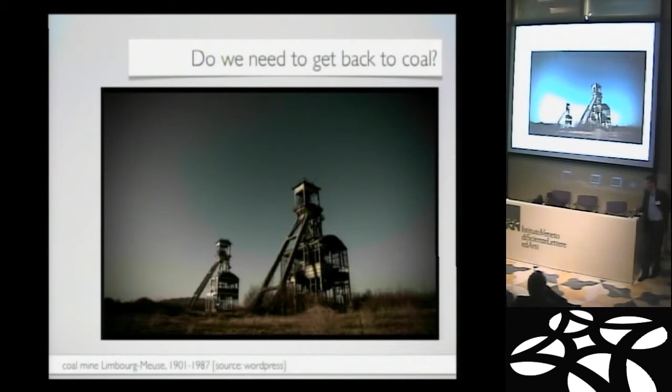Do we need to get back to coal? Burning coal. This is an old coal mine in Belgium that's not operated anymore. Should we start operating them again? We don't want to do that, of course.

We all know that there's already too much carbon dioxide in the atmosphere, more than any time since humanity started to be on the globe. And if you look at the temperature curve, it's very well correlated with the CO2, so we know this causes global warming.

And the polar ice caps are slowly getting smaller and smaller. So this is surely not what we want. So let's have a look at what energy do we really need.

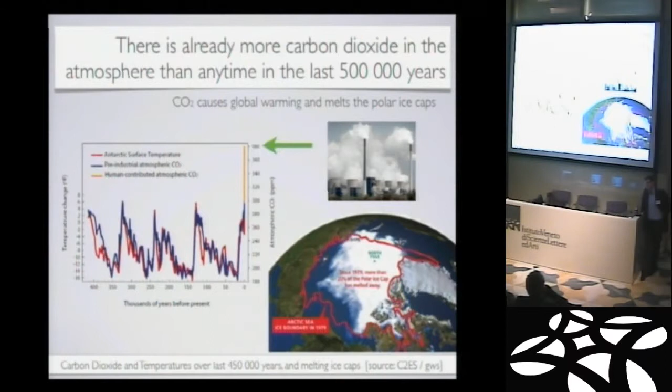I find it a very interesting computation to think of what each of our personal energy consumption is. If you think of a typical European, you can summarize the energy consumption as about 5 kilowatts. That's equivalent to 120 kilowatt hours per day, or something like 12 liters of fuel, petrol, that we burn per day.

To get an idea of what these 5 kilowatts mean, while we are sitting here, each of us has basically switched on some of these heaters that we sometimes have on cold evenings in a restaurant, these strong heaters. Such a heater consumes about 5 kilowatts. That's what we consume from the moment we are born until the moment we die.

So there is a heater switched on for each of us all the time of our life. Basically, that's what a typical European consumes. A typical American or North American consumes about 10 kilowatts, as the whole society. So we are already a little bit better, but I think we cannot reduce that to very low levels, right?

One interesting number in this context, which I was really astonished by, is when you fly once from here to the US and back, it's about 1,200 liters of kerosene, which is about 100 days of our average consumption. So it's very bad for our ecological footprint if we do long distance flights. But anyway, we do it, and this is all included in these 5 kilowatts.

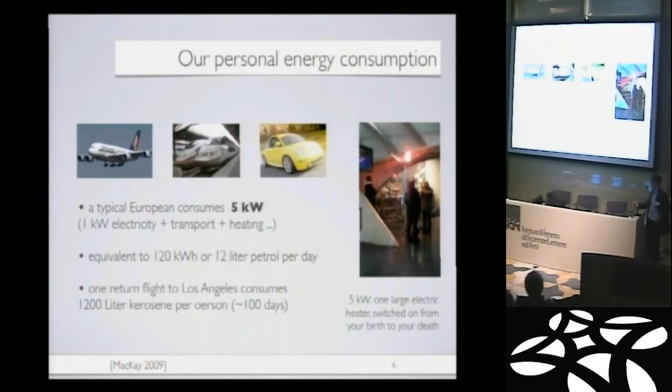So on the other hand, what we really would like to have is renewable energy, and if you look at where renewable energy can come from, it's only sun and wind that really have the potential to satisfy all our needs. And if we look at how much the sun radiates on a nice day like today, it's about...

1.3 kilowatts per square meter, and I will not bother you with too many numbers, but it's maybe interesting to remember this number. If you look at the average energy arriving on the ground in Europe, then basically to get our 5 kilowatts, we would only need 30 square meters for each of us.

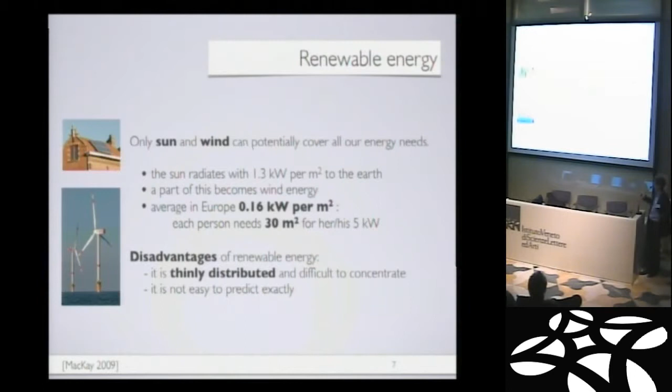That's good news, right? On the other hand, the disadvantage is these 30 square meters would not be enough because we cannot convert it all to useful energy, and also it's very difficult and costly to concentrate renewable energy. So the main problem with renewables is we need to somehow concentrate this energy.

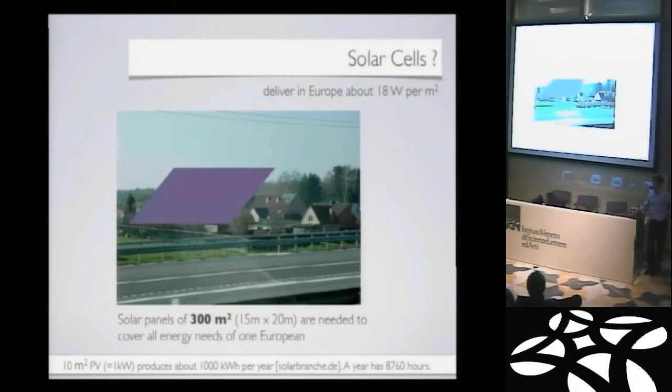Let's start with solar cells, which isn't the main topic, but I want you to get a feeling of how thin this energy is. Solar cells have an efficiency that makes, on average, 1 square meter produce only 18 watts. That's much less than the 5 kilowatts we need. We would need about 300 square meters per person of solar cells to cover our energy needs. That's average European - in Italy it might be a bit less, but not much. So it's this surface per person.

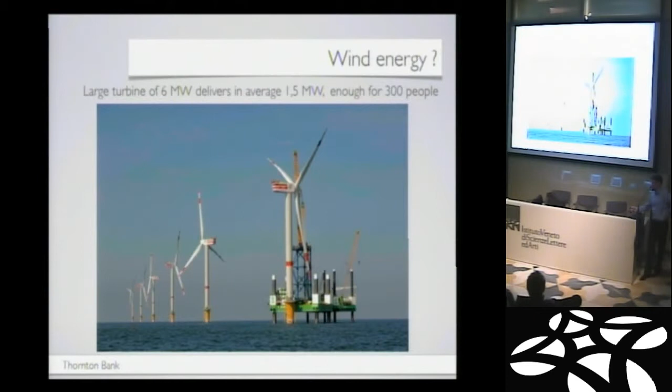On the other hand, there's wind energy, which grew enormously in recent years. The largest turbines now found in the North Sea are about 6 megawatts per turbine, and on average over a year they produce maybe 1.5 megawatts - not all the time is the wind best. But that's still enough for 300 people, so it's a lot. It's very efficient. If you compare one of these wind turbines with the surface of solar cells you'd need to replace it, it's this much surface of solar cells.

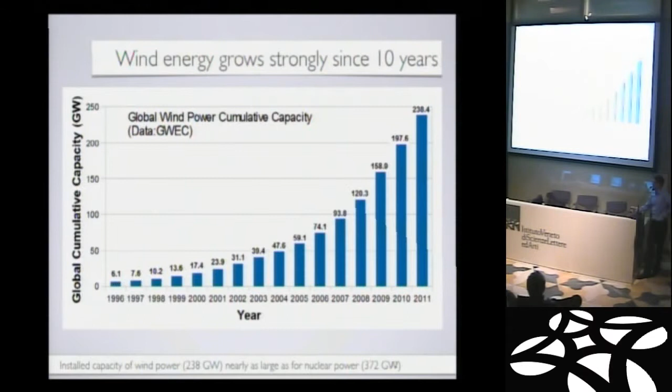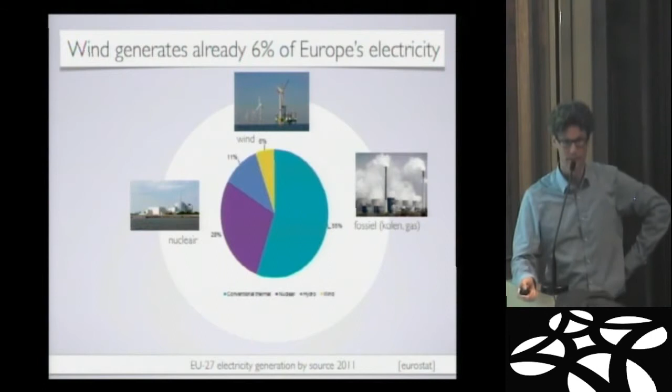It's an interesting technology for sure, and for this reason it has grown steadily for about one or two decades - exponential growth. Today it's about 6% of Europe's electricity production over the year. That's already something. But the question of my talk is: could we harvest wind power in a more efficient way? Could we make it even better?

For one of these megawatts, you'd need about 20 tons of wing material and 400 tons of foundations in the ground, in the sea. These are the foundations, as seen at the Belgian coast. The question is whether we could do this more efficiently.

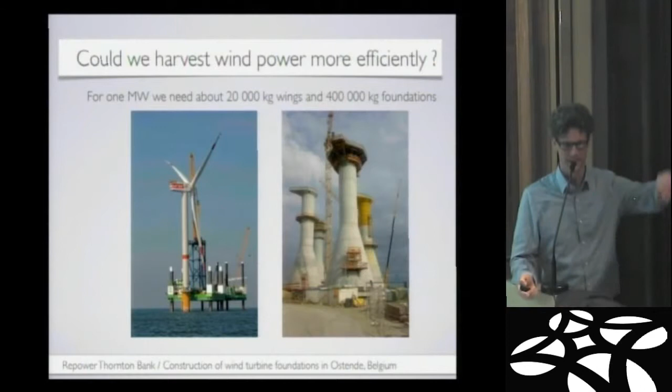That's where airborne wind energy comes in, and that's the topic of my talk.

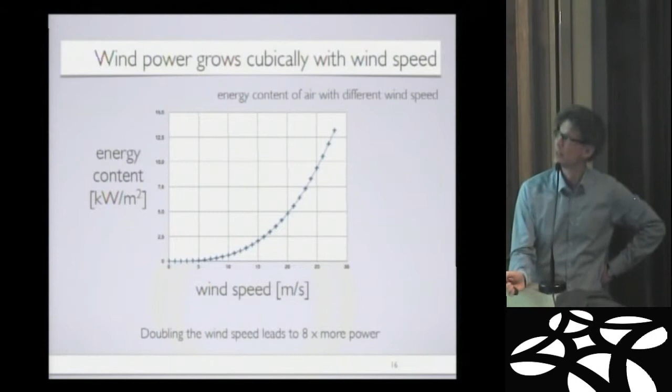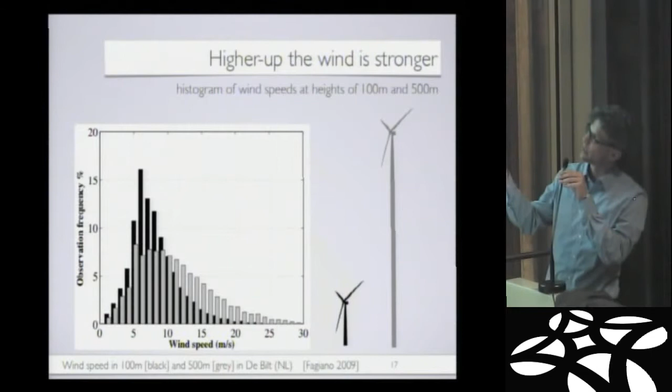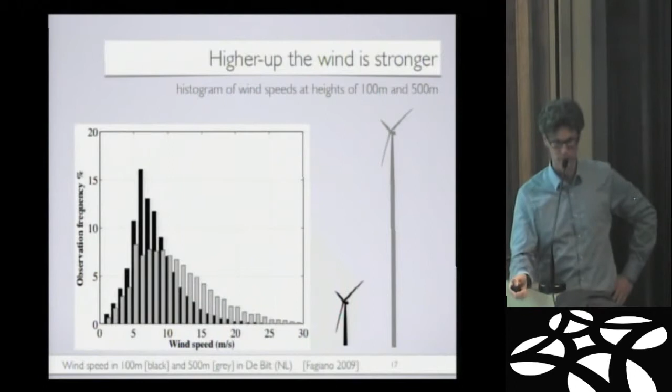That's quite impressive. On the other hand, if you go high, there's more wind, and we can look at this statistically. If you look at histograms of how often we have a certain wind speed at a height of 100 meters, like a small black turbine, we have small wind speeds very often. If we went 500 meters high, we would very often have quite high winds of 15, 20 meters per second. So it would be wonderful to build a high wind turbine.

Another fact about wind power: unfortunately there is no wind power without force. When we take energy out of the wind, we need to put a force against the wind - basically what we take out is the product of the wind speed and the force we oppose against the wind. That's exactly the same force our turbine has to withstand. So there is no wind power without a force.

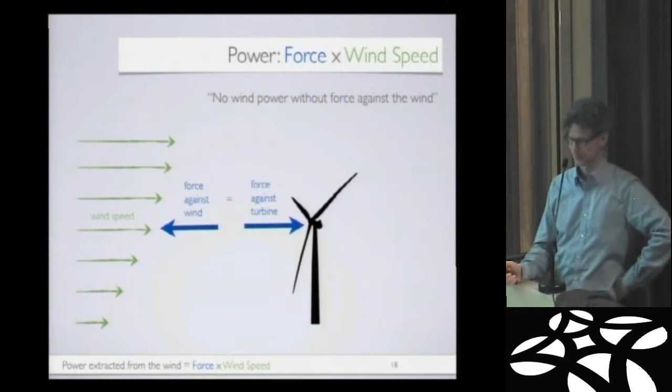That makes it a bit unfortunate to build a high turbine, given this force we need to put against the wind, if we want a turbine 500 meters high. We're able to build buildings 500 meters high, so that's possible in principle. But putting a turbine on top that harvests a lot of power would make your building fall down - you get an incredible bending moment, a torque, that will make your turbine fall. It's impossible.

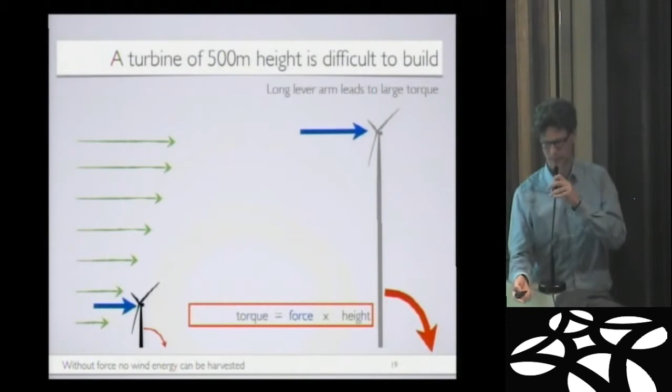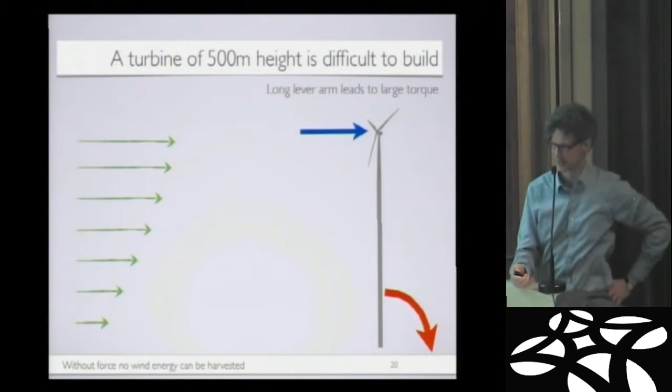So let's look at how we could build such a turbine in a better way. First, it's probably a bad idea to put a stick up 500 meters high to put a force against the wind there, right? So what would we do to get this force more efficiently? We would probably take some line, a cable, and connect it to the ground so we can take this force in a more efficient way.

And that means that we get rid of this torque. We have a force on this line, but forces on lines are much easier to withstand than torques. And so now we still have this large tower, and this is a very strange construction, because if the wind direction would turn, we would need to turn the location of this tower, right? So let's try to get rid of the tower and have something like this.

Now our wind turbine is up there, but the force is not in the right direction. Actually, it would fall down with this. So we need to turn it a bit. Just turn it a bit. And then the force is in the same direction as the line, and we could actually fly.

And this is a bit like a kite, that's what we put into the sky at a line, right? So this is a way to get force up into the sky. We lose a bit of power because we have to turn, but we don't have to turn much if our angle is deep, and if the weight is not too high, what we have up here.

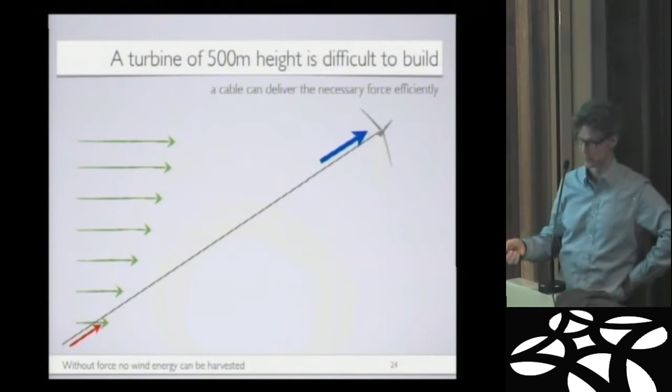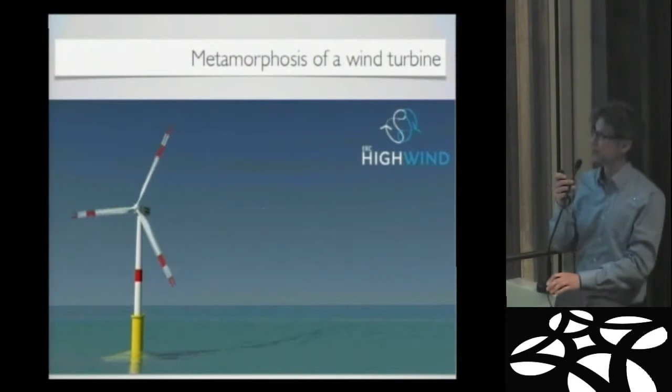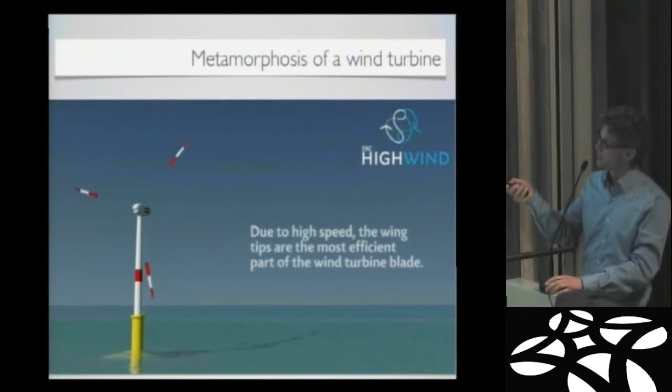So now I want to give you, so to say, our vision. Our vision is that we want to look at a wind turbine and only build the most efficient parts of it. So we take away the middle part of the wing. These wingtips are the most efficient parts of wind turbines, because they move so fast, they have a very strong influence on the wind field.

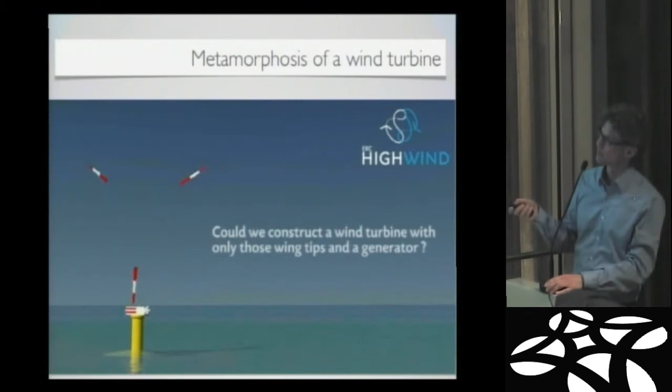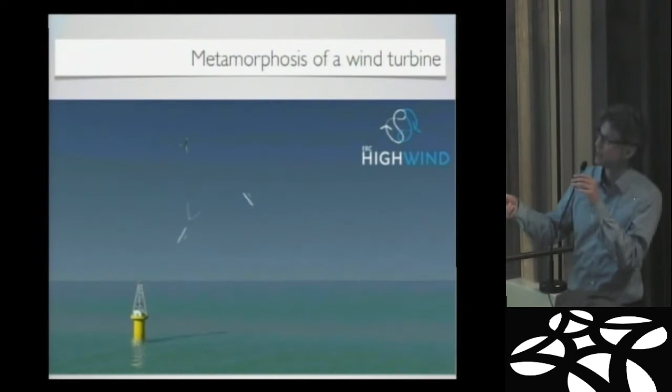Then we take away the generator, the tower, and we put the generator on the ground. And this is something we would like to build. Of course we need to transmit a force to the sky, and that means that we need some form of connecting cables that you might not see because they are so thin. But anyway, we need some way to get the force into the sky. So that's the vision that we have.

That's not reality yet, but I want to show you and explain a bit what is done in this direction, and also what role mathematics can play in this context.

So I hope I didn't bore you with the physics, the basic physics. There's one more interesting concept, and this is not very well known, I think. It's what we call the crosswind effect in this community. And there are actually different ways of how we could get the energy to the ground.

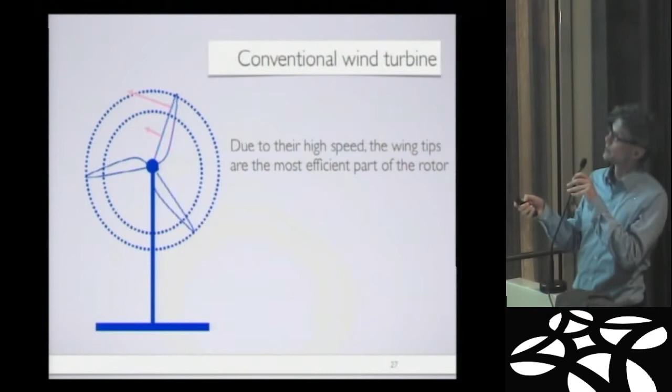So let's just summarize this video, or our idea. We want to build only the wingtips of a wind turbine. And the question is, why should this be efficient? The most important thing that makes these things efficient is actually that our wingtips move quickly.

So we need to somehow have a quick motion of this thing that is at the sky, which means that we need to put an airplane which flies fast circles around, so that it basically harvests this whole area. So that's what we call crosswind, it's flying very fast crosswind.

But still there is an open question: where should we place a generator? There is no use of this at the moment, it's just a toy. But there are two ways, and the first one is what we call drag mode.

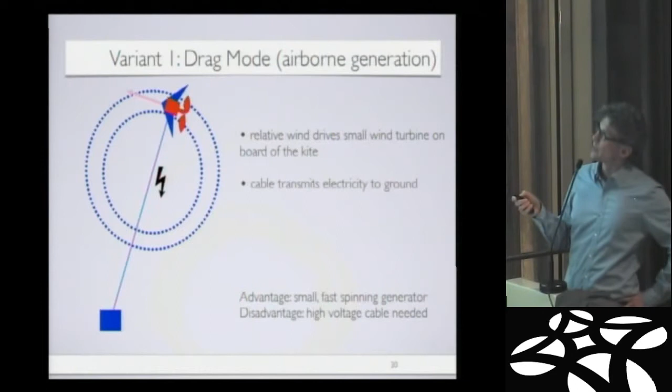Drag mode means you put a little turbine on top of this kite. Sounds like a crazy idea, so you put a little wind turbine with a little generator on top of your big wing. But the interesting thing is, because you fly so fast, your wind turbine indeed needs to be much smaller for the same power, and the generator can also be much smaller because it turns so fast.

So there's actually an advantage: you have a small fast spinning generator for enormous amounts of power. But the disadvantage is that you need quite high voltage cable power transmission through this cable. But this is a system that's built, I will outline that in a minute.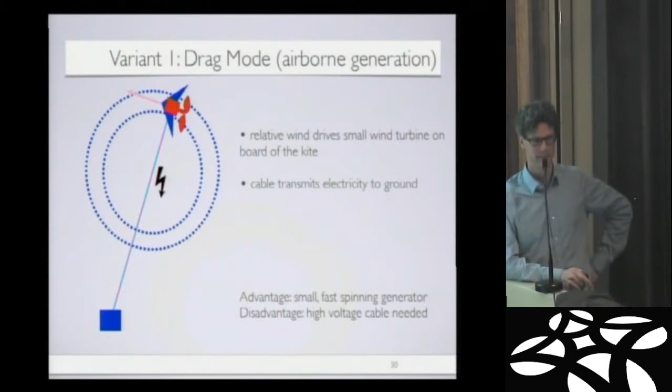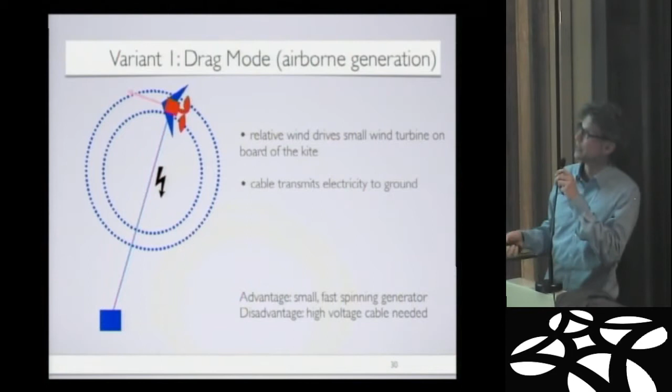But there's a more elegant way to transmit the power that I really like more, and which made me very excited when I found out about it first. And that is the second variant, and that's what we call lift mode.

What we do here is we still fly our kites in fast circles in the sky. This produces an enormous force on the tether, and we can use this force to roll out the tether, which drives a drum on the ground, which then drives a generator. So you basically pull a load.

That's what we do, and we spiral out. At some point we need to invert the cycle to come back with our kite, so we change the angle of attack, fly slower, and go into what we call the retraction phase, flying toward the ground with very small force, so we don't lose much energy.

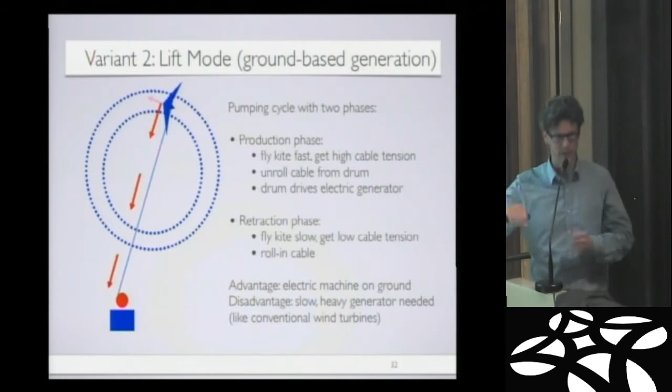The advantage is we now have all the electric machinery on the ground. The disadvantage is that the speed of rolling out and rolling in is relatively slow, so you need a relatively heavy machine, nearly as heavy as the machines on top of wind turbine towers. So we don't get the advantage of very fast spinning electrical machines, which is good for the other variant.

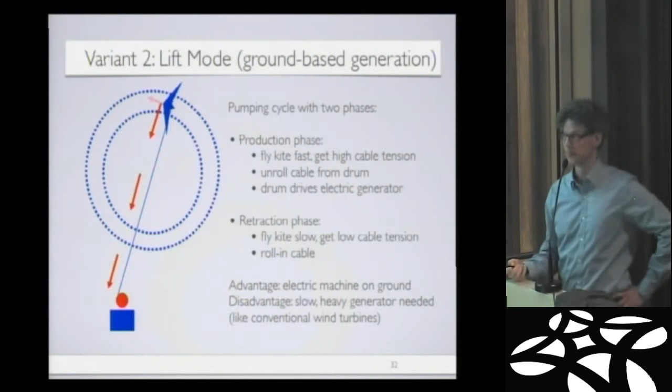To illustrate that more pictorially, here's a picture with a cable and a drum. Electricity is produced while the airplane makes loops in the air. At some point we fly back, there's no tension on the tether, and we lose a bit of power, but this is short and not nearly as much as we produce during the other phase.

I'm a trained mathematical optimizer by my first education, and I want to come to path optimization of these airplanes later. But let's start with the first and very simple optimization problem in this context: how fast should we roll out in this phase?

If we do it too slow, the generator won't turn and no power is produced. But if we do it too fast, the airplane will fall down, because it doesn't see relative wind anymore - it's not driven by the wind anymore. So the question is, what roll-out speed is optimal?

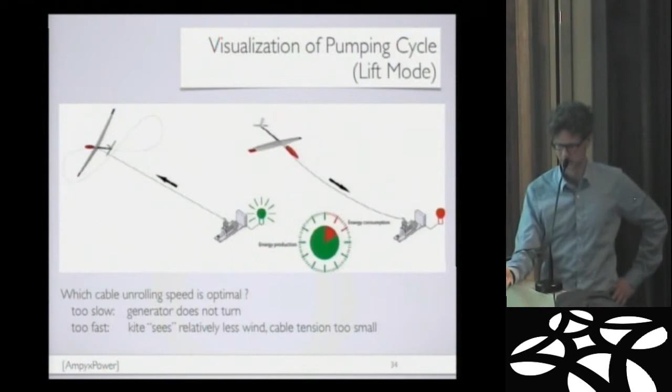If we look at the rolling-out speed as a fraction of the wind speed from 0 to 1: if we roll out at the same speed as the wind, the kite doesn't see any wind, and there's no force on the line - that's this green force curve. The force is maximum if we don't roll out.

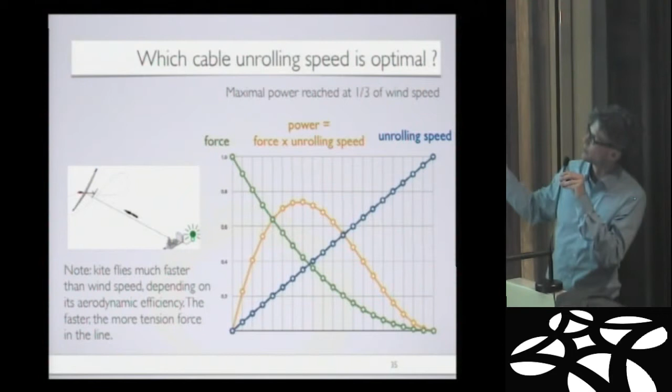Power is force times speed, so if we multiply these two curves, we get a polynomial of third order, which has its maximum at 1/3 of the wind speed. That's the optimal roll-out speed at which we'd generate maximum power.

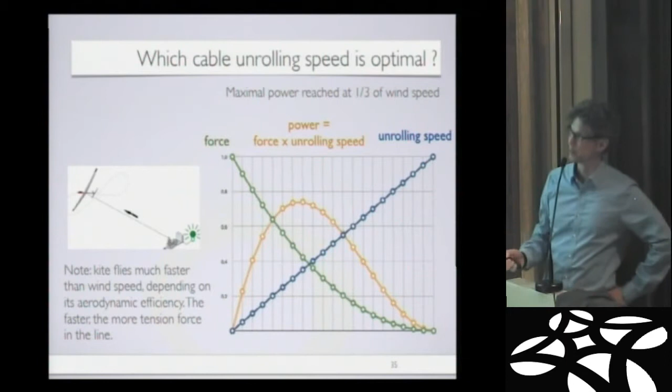If you do a bit of physics using this result, you get a formula that many people in the field discovered independently, and later we found it was derived in 1980 already by a smart engineer in California. So we call this Loyd's formula.

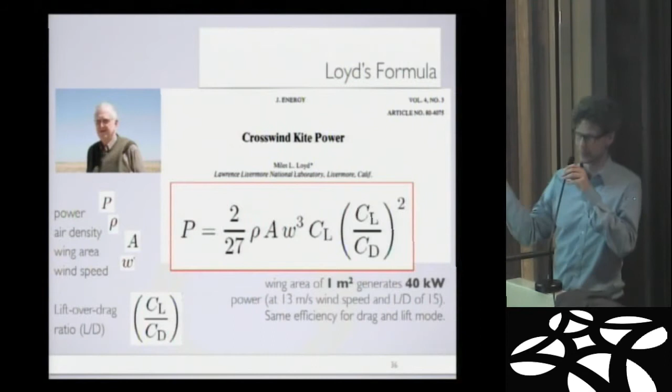That gives a relation of how much power a given wing area in a given wind field would produce. This depends very strongly on the number CL over CD, which we call the lift over drag ratio - something like the aerodynamic efficiency of wings.

For planes it's called the gliding number - the amount a sailing plane can go forward compared to its sinking speed. Typically these numbers can be up to 60 for good sailplanes, so this is a big number.

If you put moderate numbers into this formula, you can easily compute that 1 square meter of wing surface of such an airborne wind energy device could generate 40 kilowatts of power. That's a lot, and this number attracts a lot of people because we think it's really incredible - we should try to get this way of concentrating wind power working.

Just to get a feeling for this number, it's much more than 300 square meters of solar cells would produce. And if you assume such an apparatus would only operate 1/4 of the year at full load, which is realistic, you'd still get 10 kilowatts out of 1 square meter over the year.

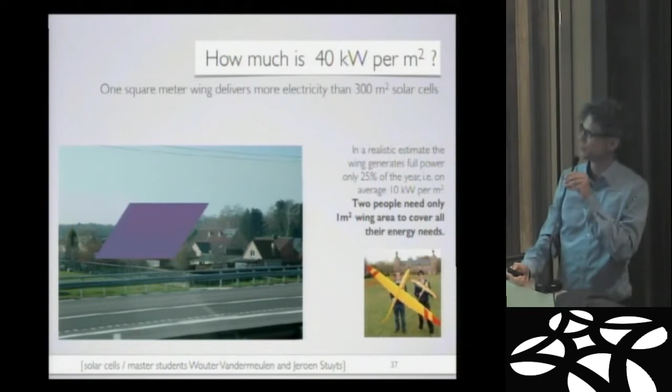And it would mean that for 2 Europeans, this wing area would basically be enough to get their whole energy needs delivered, if this kite is flying all the time, of course, while they are living. So that's what attracts us, and so it attracts a lot of people, and the community is growing.

This was the last of the yearly conferences, in Berlin last September. And I wanted to outline only 2 of the concepts, the many that are presented at these conferences. And maybe to get a big picture, we can classify all concepts.

So there are soft wing concepts. There's also some soft wing concepts investigated in Italy. And then there are the fixed wing concepts, which have basically airplanes. What they all have is something like a wing and a tether. That's it. I want to outline these two, the ground-based generation and the onboard generation that I mentioned before, and show what companies are pursuing this.

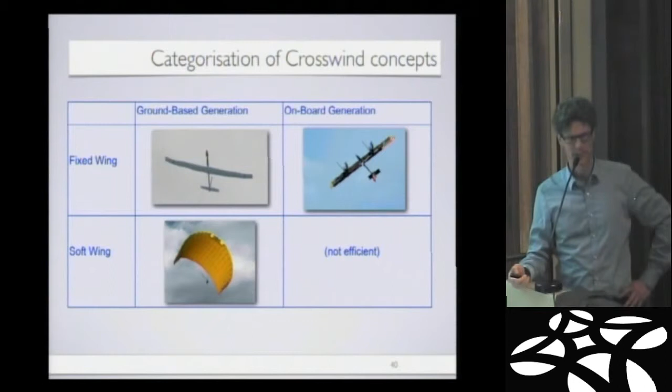So the first one is a company in the Netherlands, Ampyx Power. They build these little planes. They have this cycle that I've just shown, and that's what they want to build. They are about 10 permanent people now. It's a startup at TU Delft, and they are financed by venture capital. We have a joint PhD student starting very soon, so it's a very research-intensive company as well.

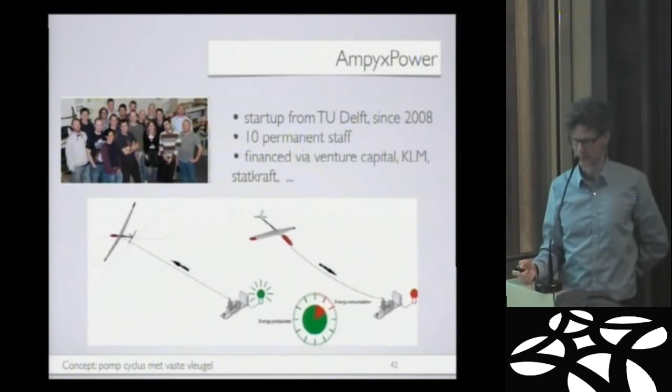So to get you an idea of how that looks in practice, just a very short show. Here you have this winch, there's the airplane, there's a tether, and the plane makes some loops, which means it flies crosswind. There's an enormous tension on this line, and it's going actually out and in, in order to produce power. Now it's going out, and later it will go in.

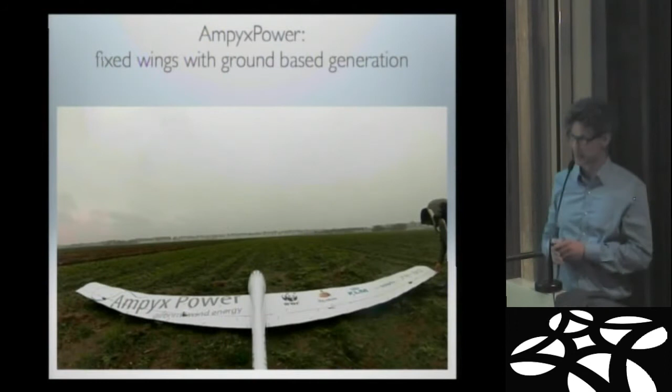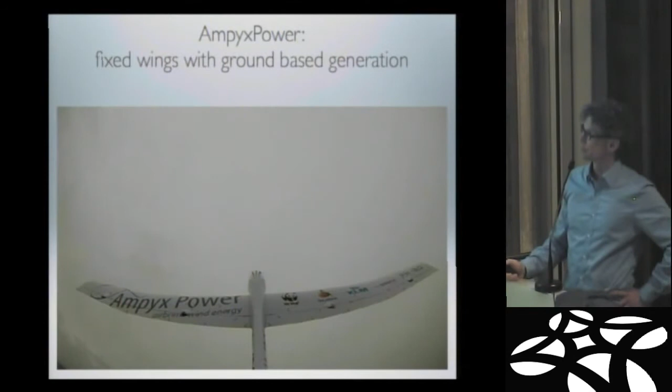I decided that this could be better seen from the point of view of the airplane. So here's how they start, same company. There is a tether, it's pulling the plane up. Now the camera is at the end of this airplane, and it's going pretty fast into power production. You see at the bottom the Netherlands at this season, I think.

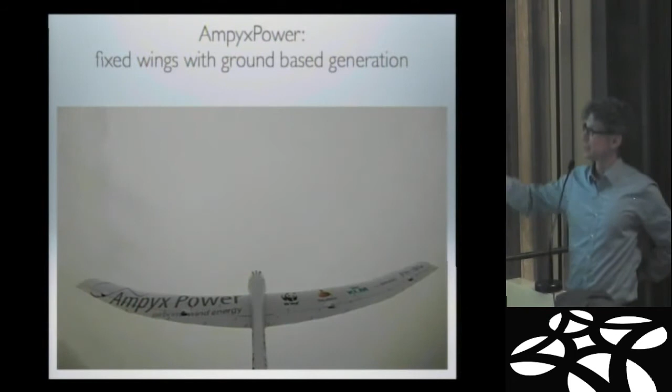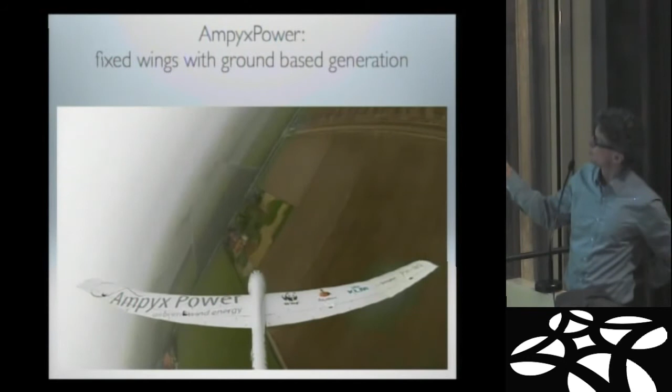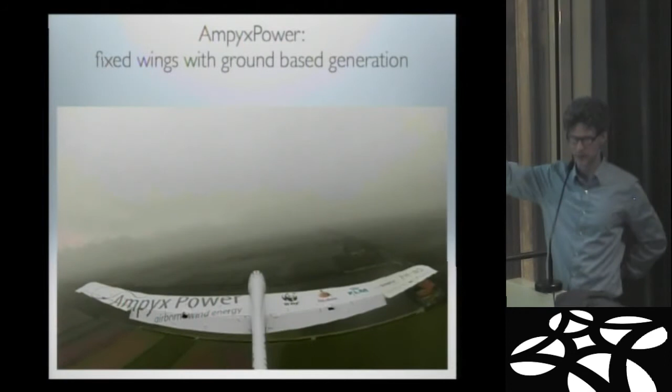And you see that the plane is making loops, so it's turning and producing power all the time. You see a little bit of motion here, so that's how such a plane is controlled, like any airplane. It's still producing power, it's very fast, and now it starts to slow down and go into a retraction phase. So now it's actually flying towards the attachment point and losing a bit of power. And now that's already finished. That was very fast, and now it's producing power again.

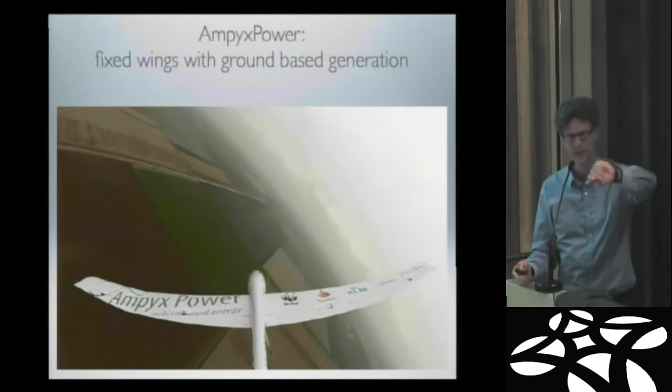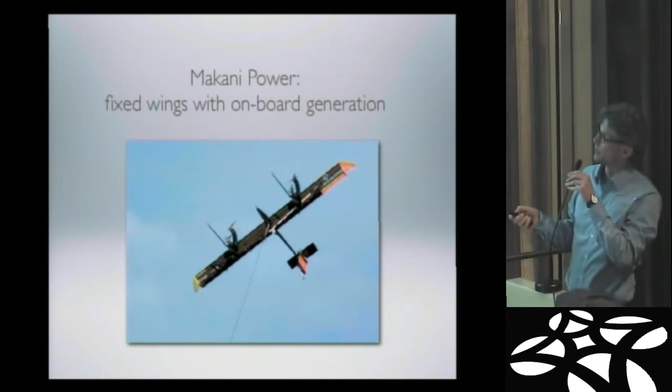So this was the first company I wanted to present. The other concept, which is also quite exciting, I find, is these fixed wings with onboard power generation. This is a startup that's existed since 2006, in California, with about 15 people working on it. They built these fixed wings with onboard generation, meaning little air turbines on board. But recently they were bought by Google X.

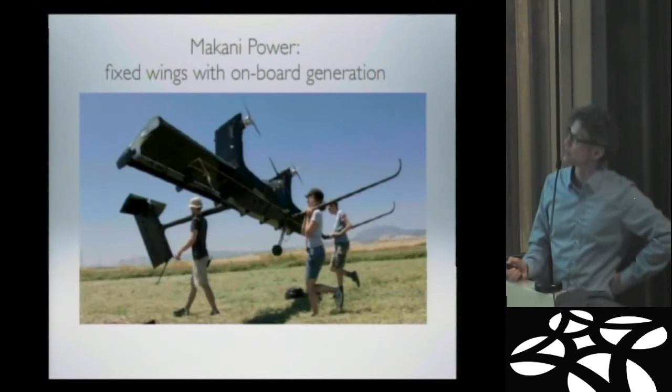That's this secret part of Google which invests into new technology, like self-driving cars and Google Glass and such things. Now they also bought this company, which made this company very happy because they don't have to think about investment anymore. So now what they are doing is they built a plane which has a lot of propellers, at least 4, and then they have a cable, and they fly circles.

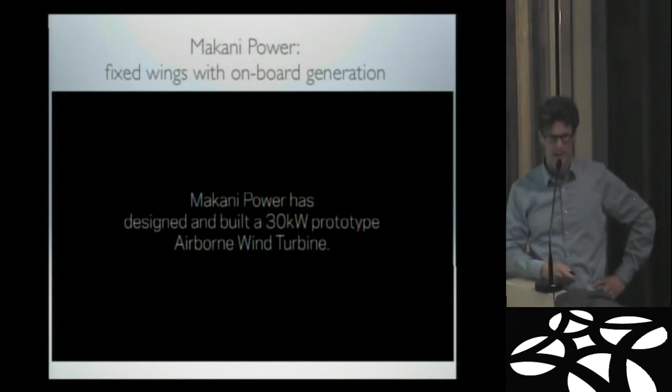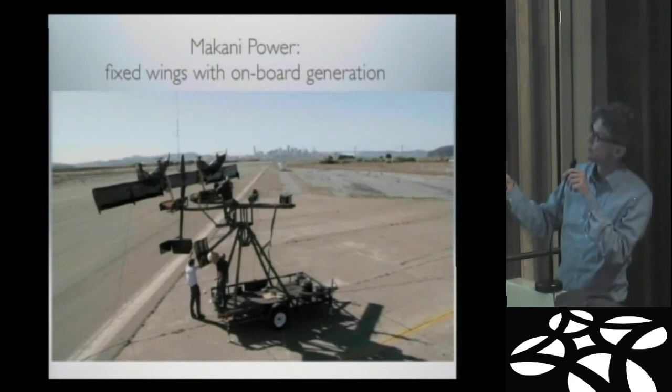So this is one of these circles with many pictures overlaid. And here's a little bit of a video which shows how this system works. What is interesting here in particular is how elegant you can start these things. This is a 30 kilowatt machine, a small one that was already built a few years ago. Here you see it's hanging actually inside a perch.

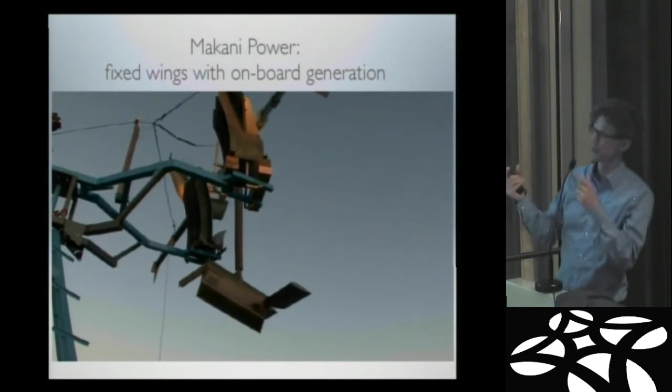This is the control room. And then the propellers start to spin, and there are 4 of them, and so they basically lift this airplane into the sky. It's just hanging on its own propellers, that's it, like a helicopter.

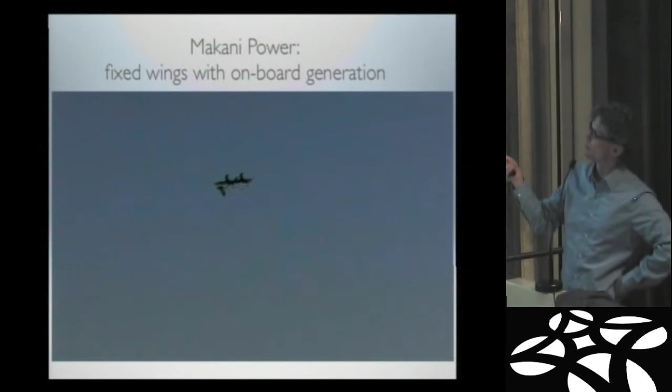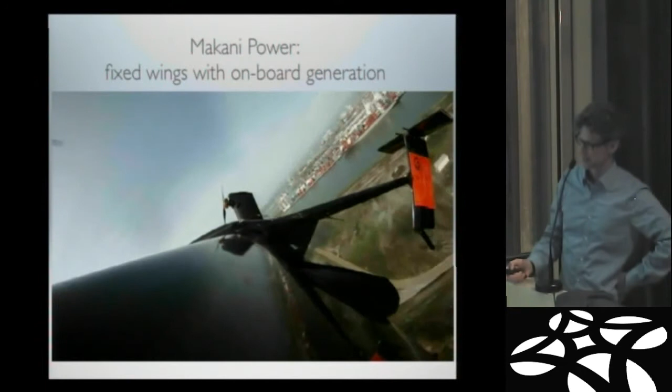So here you see some pictures, and I think I want to go on. This gave a rough idea that this is a real technology, it's existing.

But there are lots of questions you can ask, and one of them is how would we optimally fly these wings? I said already that rolling out with 1/3 of the wind speed is good, but how high should we fly? How long should the tether be? Which angle should it have? How thick should the tether be?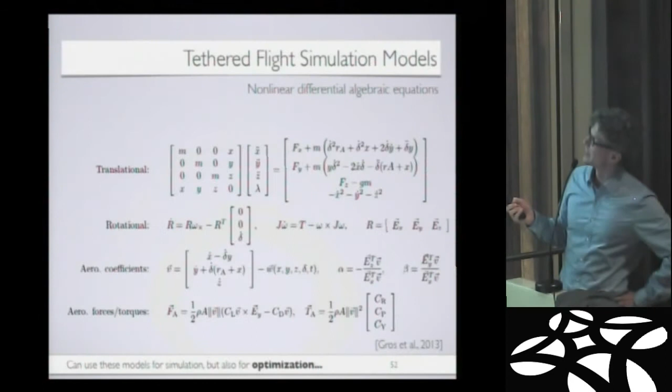And all these questions can be answered by optimization. This is what we focus on in Leuven and Freiburg. This is an ERC project which funds about 6 people, and we focus on computer simulations and optimization. We also built a small prototype, because my experience is that even the most mathematical people get excited and more productive if they see the real prototype where they should validate their models and test things. But I should also say that it's eating a lot of resources, which we would otherwise use to do brainy stuff.

Anyway, what we are interested in are computer simulation models. I will not go into details, but the model class we use is the same, you could say, that you use in flight simulators. It's complicated nonlinear differential algebraic equations models of index 3, but you can treat them very efficiently nowadays and even optimize in a very short time. So we don't only simulate, but we also optimize.

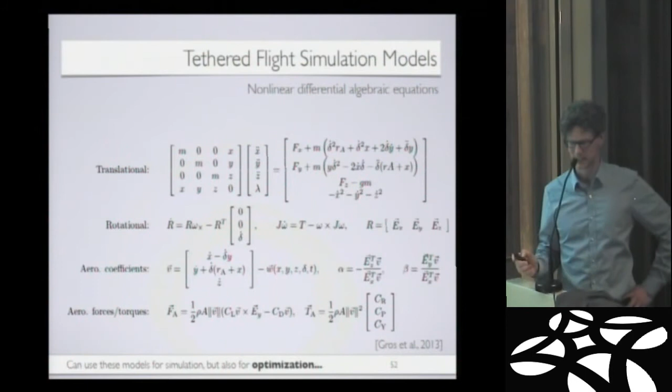And this optimization is what I find interesting and which I want to share also with the non-mathematical people here in the audience. I skip completely any description of the optimization problem, but I just formulate in words what we want to do.

This is actually an optimization algorithm at work, which tries to find an optimal orbit of these orbits that we have seen for the company Ampyx Power. You have seen there was this orbit where you fly loops first. This is the result of an optimization. You fly loops which produce power, and then you fly back and you don't lose too much power, hopefully.

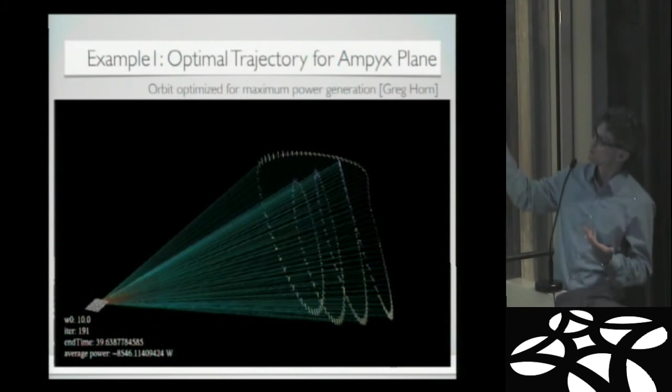What is interesting about this problem is that we can formulate basically our differential equations. We can formulate the only objective, and the objective is just maximize the power production. Power is lost in this phase, but it's produced in this phase. So it wants to stay as long as possible in this phase and be very quickly in this phase, and this is actually what we thought before, what the engineers also fly, is also coming out from optimization.

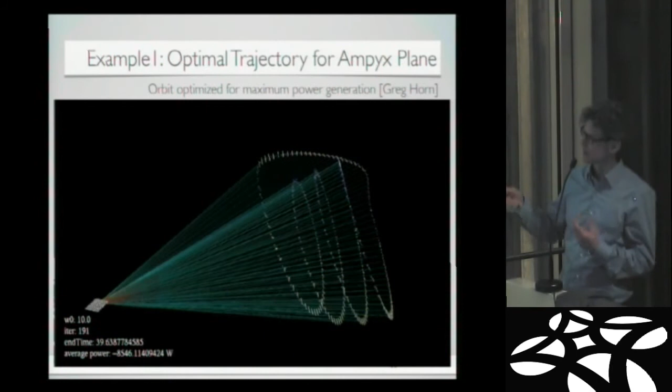I show this again, just to get this. So there was no guess, we just say fly somehow, and then the optimizer chooses several thousands of variables in order to find the optimal solution, and this is something that you could afterwards fly.

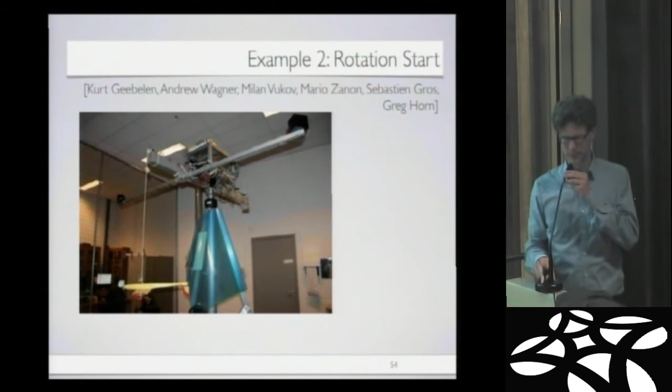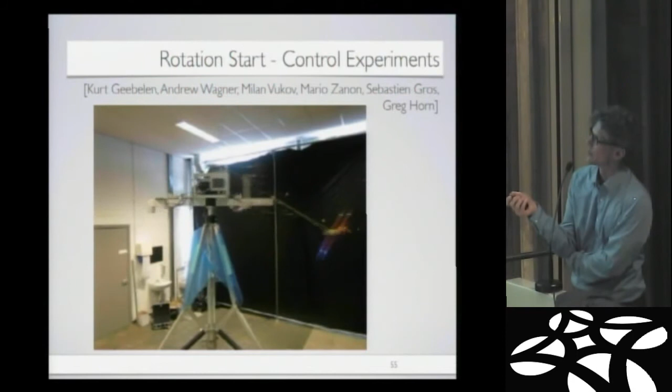As I said, we also want to build such a thing, and we actually want to demonstrate that you can start these apparatuses not with a winch, but also with a rotation. So what we want to demonstrate is actually that you could start with a simple principle which is similar to what we have seen here.

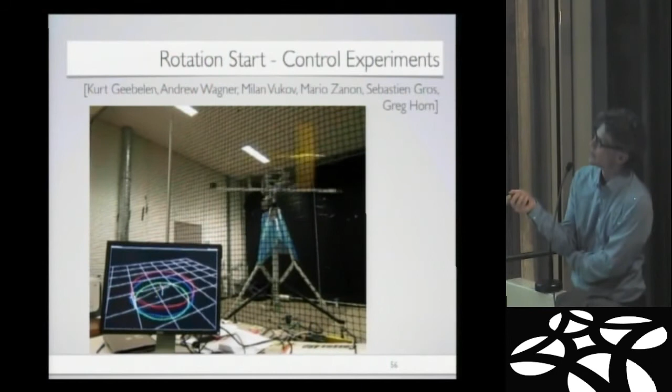Then we work on computer-based control, where you have always a computer model running inside the computer, which predicts and allows you to optimize your system all the time.

And our vision at the end is that we have such a little carousel here that flies in a starting orbit, just circles, and that then we make a plan of how we get into these power generation orbits. This is a physical simulation, but it's not a reality.

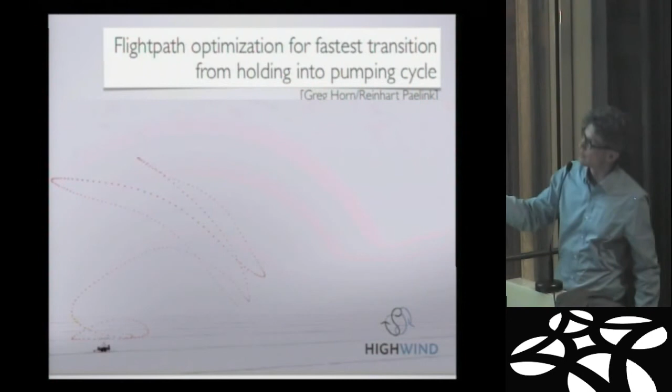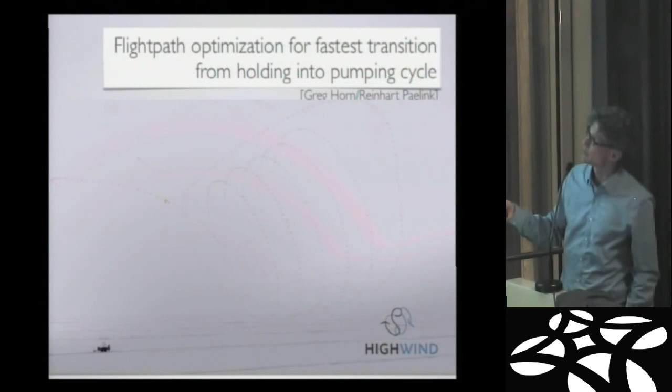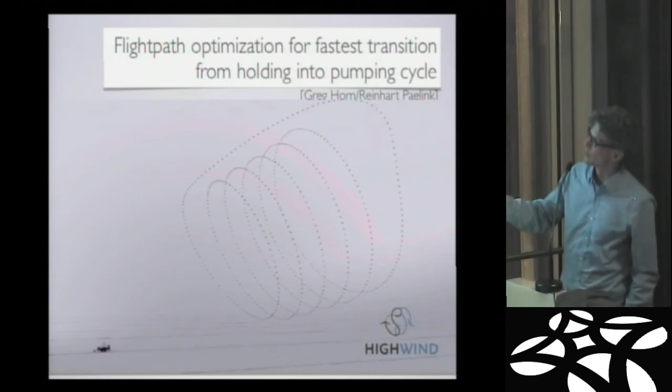You fly with this airplane along this pre-computed path, which is looking very complicated. It's a very nonlinear system, of course. The wind gets stronger high up, and then you transition into such a power orbit that we have seen before. So that's the vision that we want to realize - to come from this little apparatus for starting up to a gigantic wind turbine, so to say.

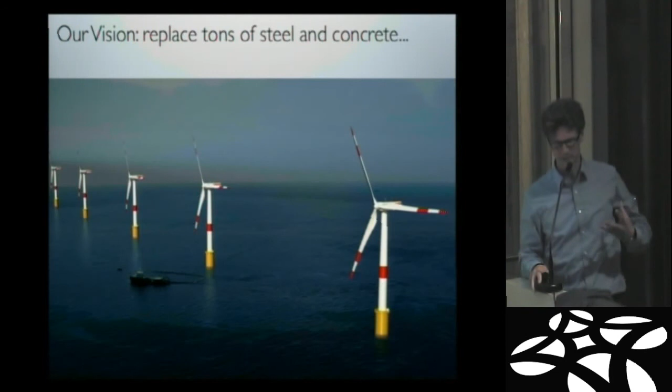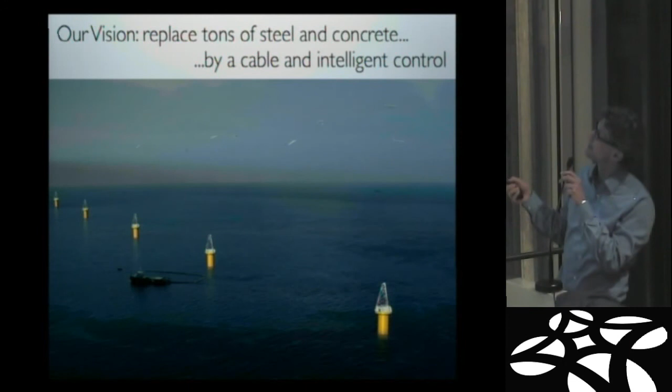I think I need to come to the end, and that's also where I plan to stop. Instead of having some conclusions in words, I just want you to keep this message: our vision in this community is to replace tons of steel and concrete for these already quite efficient windmills by just a tether and a lot of intelligence and intelligent control.